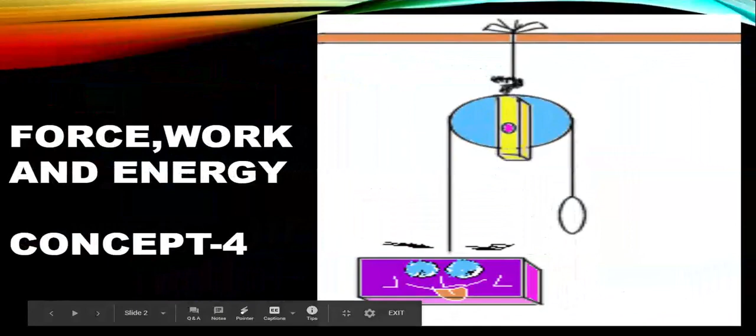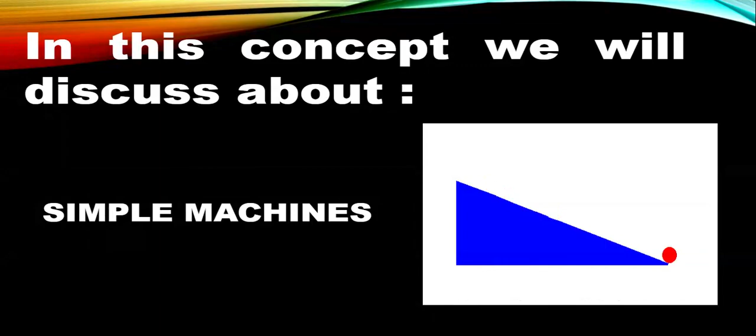Today we are going to discuss concept 4 of the force, work and energy chapter. In this concept we will discuss simple machines. So let's go.

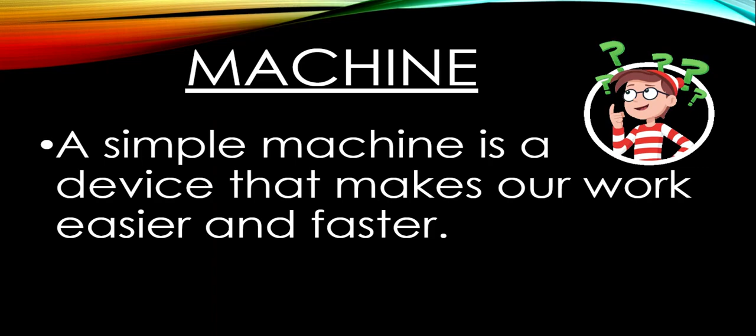Dear children, as you already studied about simple machines in class 4, do you know what simple machines are? Simple machines are the devices which make our work easier and faster. There are many types of simple machines like inclined plane, lever, wedge, screw, pulley, and wheel and axle.

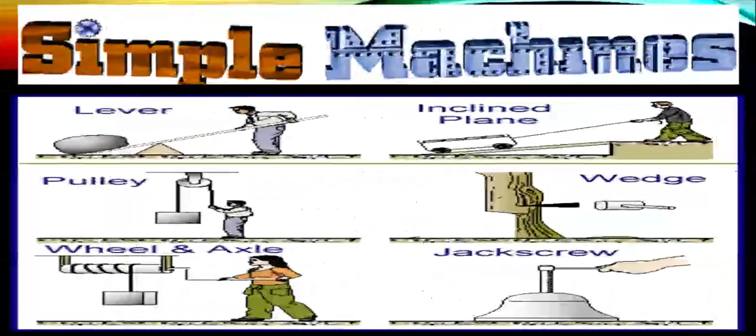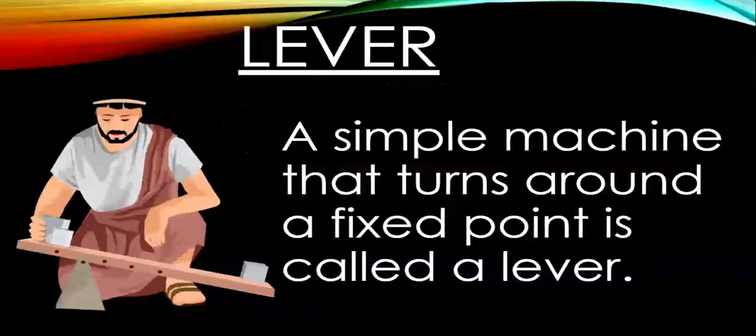First, we will discuss lever. Do you know what a lever is? A lever is a simple machine that turns around a fixed point, as you can see in this picture. A lever helps us do more work by applying less force, and this makes our work easier.

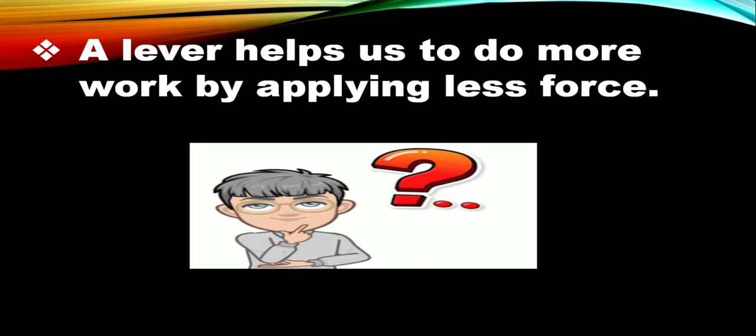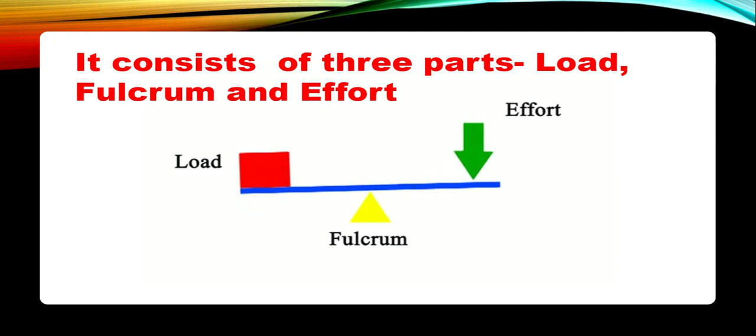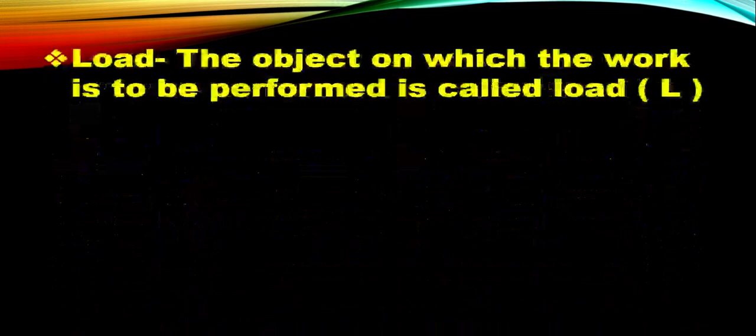It consists of three parts: load, fulcrum, and effort. The object on which work is performed is called the load. The force applied on a lever to lift the load is called effort. The fixed point on which a lever turns is called the fulcrum. I hope you all have understood the parts of a lever.

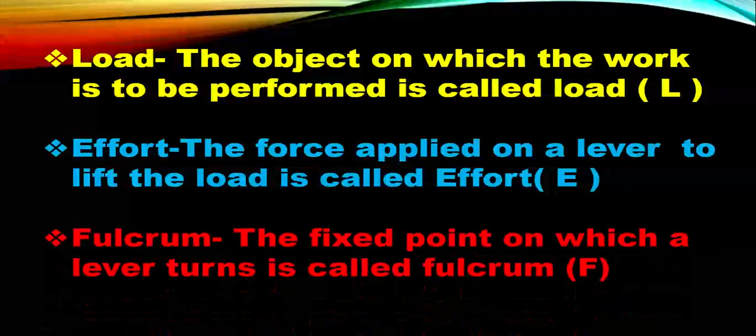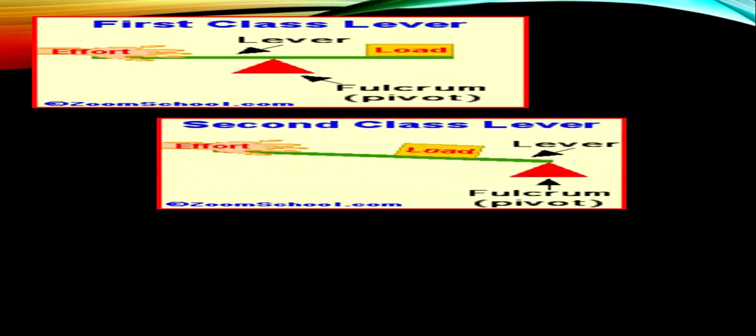Now let us discuss the classes of lever. There are three classes: first class lever, second class lever, and third class lever. In first class levers, the fulcrum is in between the load and the effort, as shown in this picture.

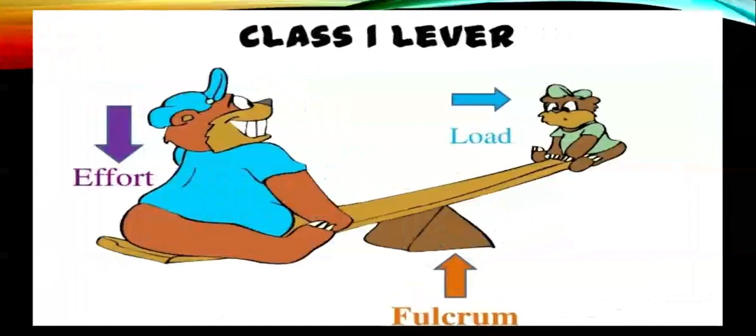Some examples of first class levers are seesaw, crowbar, and scissors.

Now let us discuss second class lever. In second class lever, the load is in between the fulcrum and the effort, as you can see in this picture.

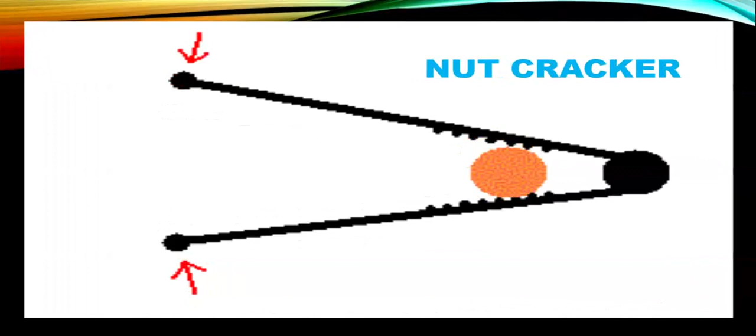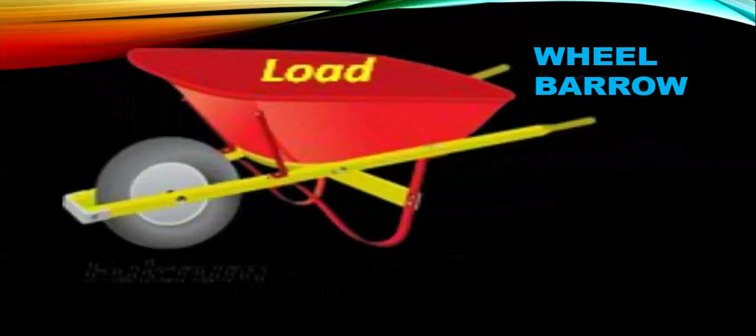Some examples of second class lever are bottle opener, where the cap in between acts as load; nutcracker, where the nut in between acts as load; and wheelbarrow. So these were the examples of second class lever.

Now let us discuss third class lever. In third class lever, the effort is in between the fulcrum and the load, as you can clearly see in this picture.

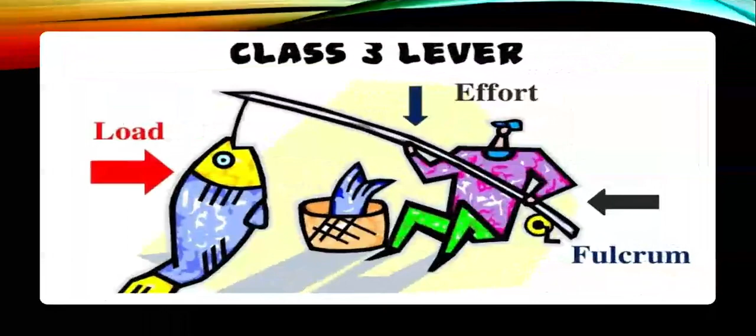Some examples of third class lever are stapler, ice tongs, and forceps. Children, this is all about lever.

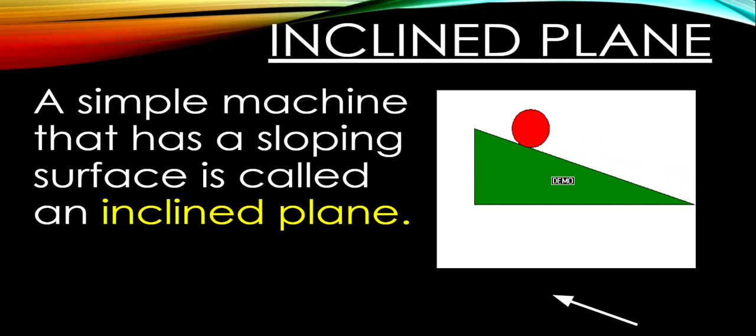Now let us discuss the next type of simple machine, which is inclined plane. An inclined plane is a simple machine that has a sloping surface. You must have seen in hospitals, inclined planes are provided so that wheelchairs carrying patients can be easily pushed.

Other examples of inclined planes are slides, which you can easily see in the park, then ramps, and sloping wooden surfaces or planks. You must have seen wooden planks attached to a truck to lift heavy boxes. With the help of these planks, the boxes can easily slide over it and it reduces our effort. So this is all about inclined plane.

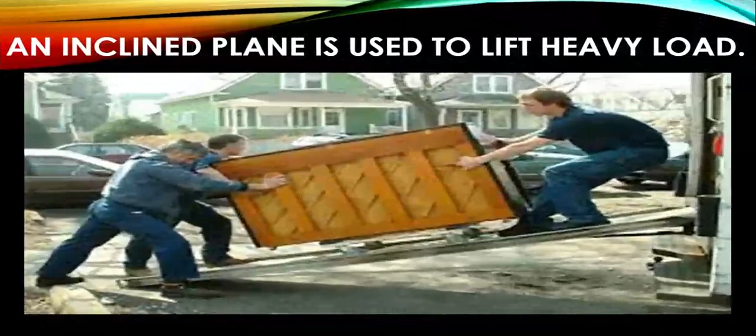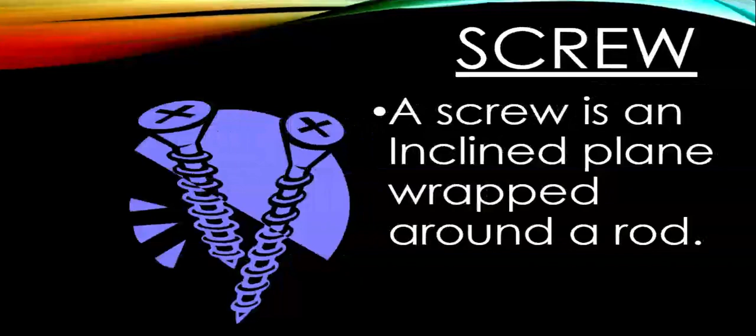Now let us discuss another type of simple machine, which is a screw. A screw is an inclined plane wrapped around a rod. A screw looks like a nail with grooves into it. A screw can hold things together very tightly and it provides a better grip than a nail.

A screw jack is an example of a screw and it is used to lift heavy vehicles. I hope you all must have seen a screw jack.

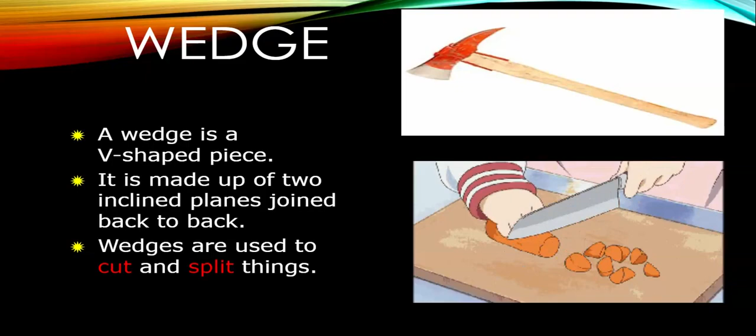Another type of simple machine which we will discuss today is wedge. A wedge is a V-shaped piece made up of two inclined planes joined back to back. Wedges are used to cut and split things. Some examples of wedge are axe, knife, and blade, which are used to cut and split things. I hope it is clear to you all.

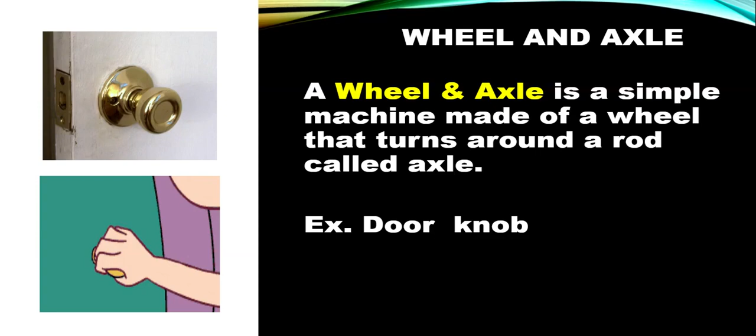Another type of simple machine which we will discuss today is wheel and axle. A wheel and axle is a simple machine made up of a wheel that turns around a rod called axle. The best example for wheel and axle is the doorknob which everyone has at home. You can clearly see in this picture how this arrangement looks.

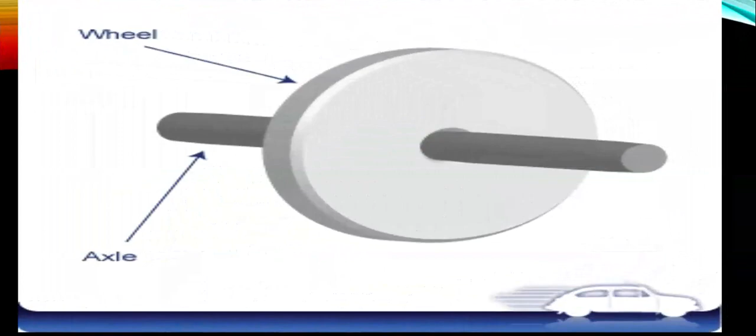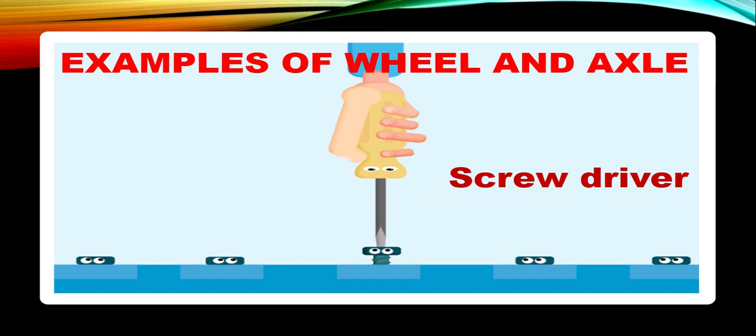With this arrangement, it takes less force to move something. Some other examples of wheel and axle are a screwdriver, which everyone must be having at home, then sewing machines, giant wheels, and the steering wheels of a car.

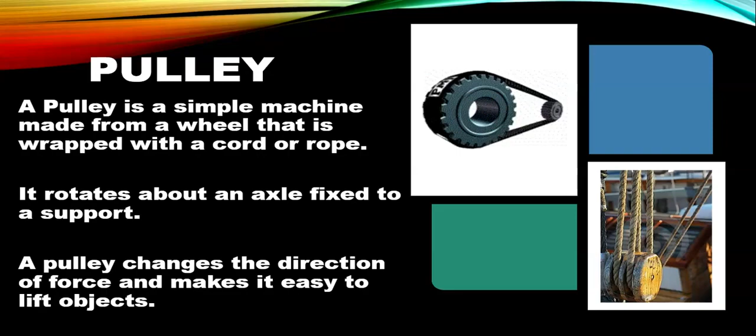Now let us discuss another type of simple machine, which is a pulley. A pulley is a simple machine made from a wheel that is wrapped with a cord or rope, and it rotates about an axle fixed to a support. A pulley changes the direction of force and it makes it easy to lift objects. You can see in the picture how a pulley looks.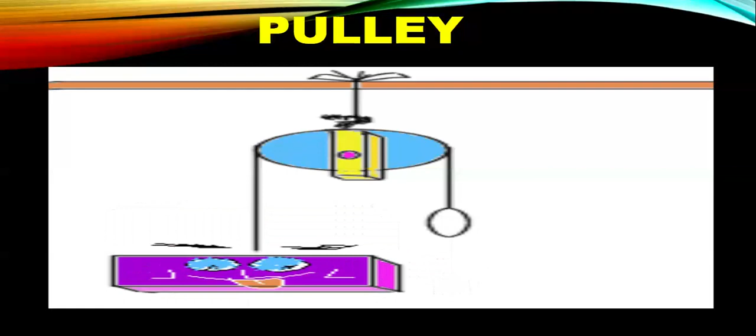Children, in order to lift up the object, you need to apply force in the downward direction, as you can see in the picture. Do you know where pulley is used?

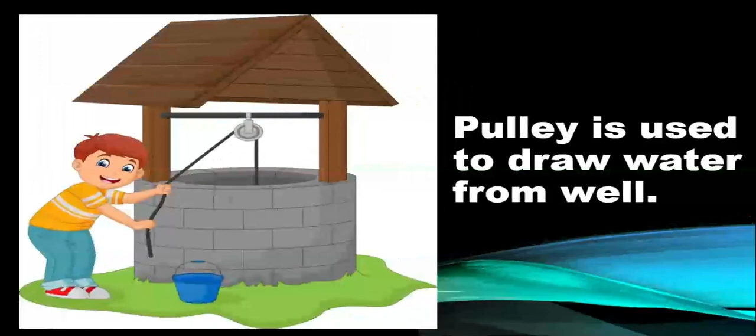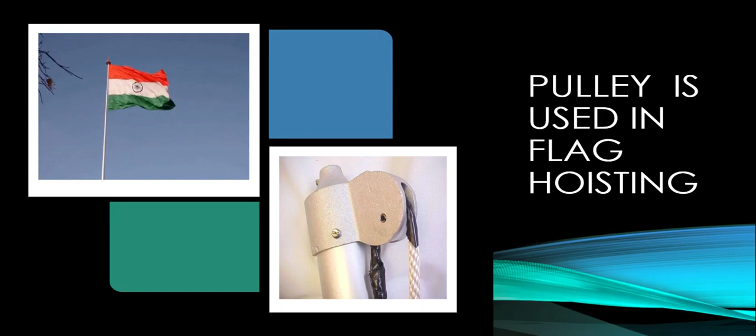It is used in so many places, like to draw water from the well. As you can see in the picture, there is a pulley attached on the rod, and it is also used to lift heavy objects in factories. We also use a pulley in flag hoisting — you can see at the top there is a pulley around which the rope is wrapped — and it is even used in window blinds.

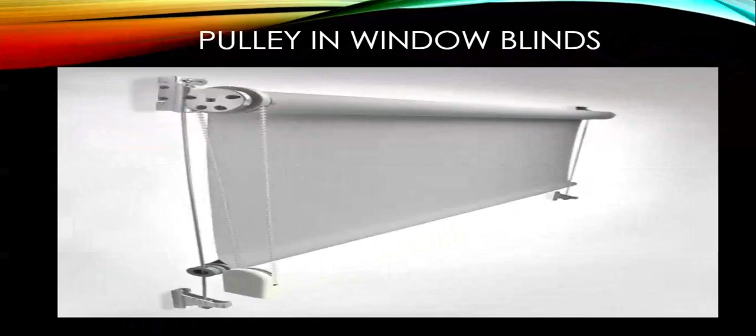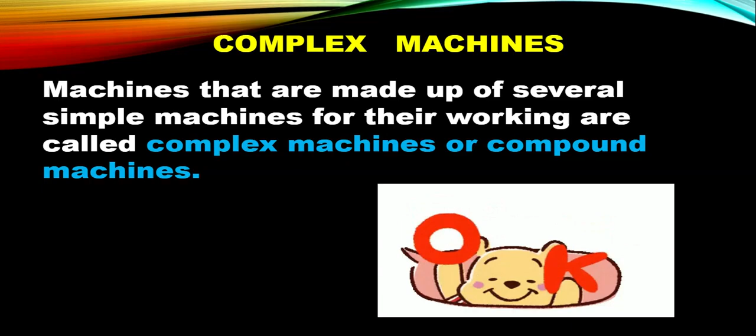So children, that's all about simple machines. Now let us quickly discuss complex machines. Complex machines are made up of several simple machines, and they are also known as compound machines.

Some examples of compound machines or complex machines are cycle, robot, car, aeroplane, and so many other complex machines which we use at home like air conditioners, refrigerators, washing machines, televisions, etc.

So children, today we have finished this chapter. Go through the previous videos for a better understanding of the concepts.